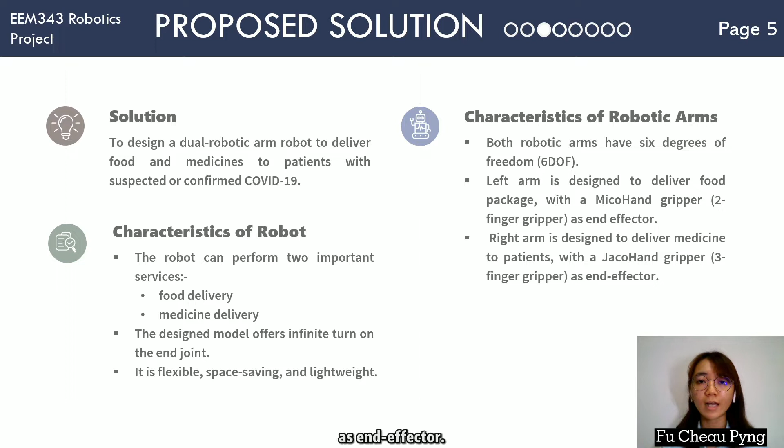The objectives of this main project are to incorporate a robotic arm, which is essential and can be used in hospital for food and medicine delivery purposes, to reduce healthcare workers' workload, to increase the efficiency of food and medicine delivery, and to lower the risk of infection amongst the healthcare workers.

To calculate the forward kinematics of the robot, the Denavit-Hartenberg convention is used. Firstly, draw the kinematic diagram of the right robotic arm and assign axes onto each joint. Next, write down the DH parameters for each joint.

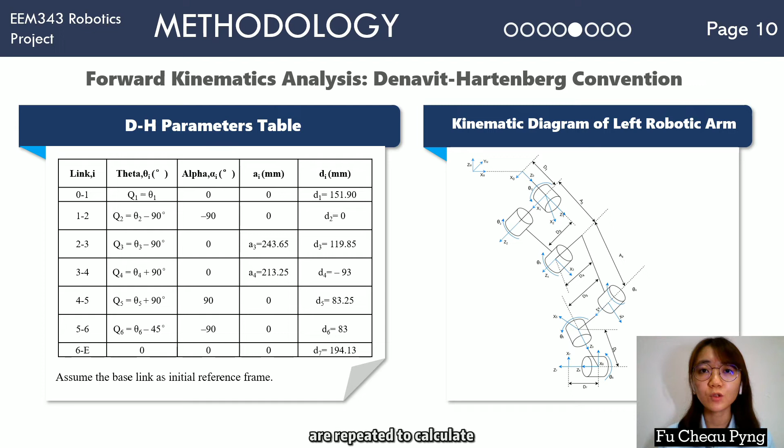Each joint transformation is formed by substituting the corresponding DH parameter into the homogeneous transformation matrix. The total transformation of the right arm of the robot is calculated as shown in the slides. The previous procedures are repeated to calculate the forward kinematics of the left robotic arm.

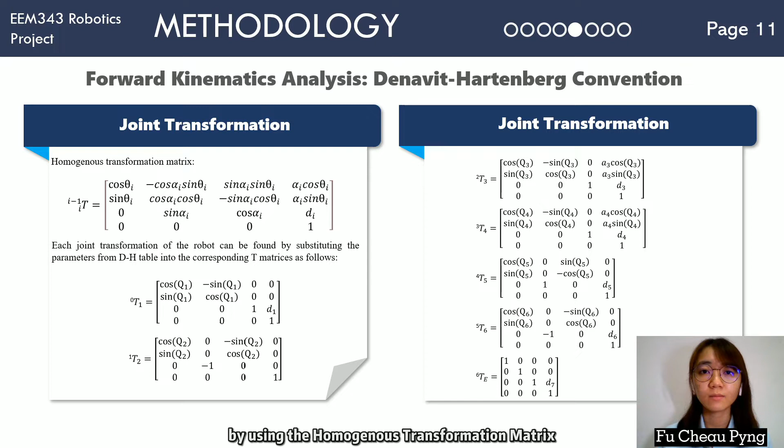Again, each joint transformation is calculated by using the homogeneous transformation matrix. The total transformation of the left arm of the robot is calculated as shown in the slide.

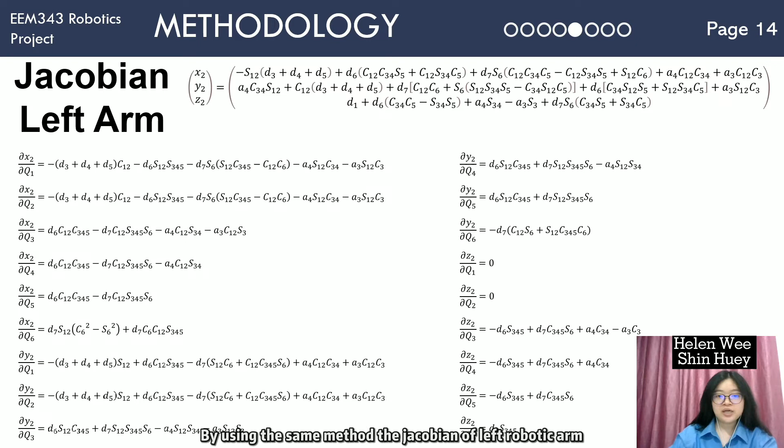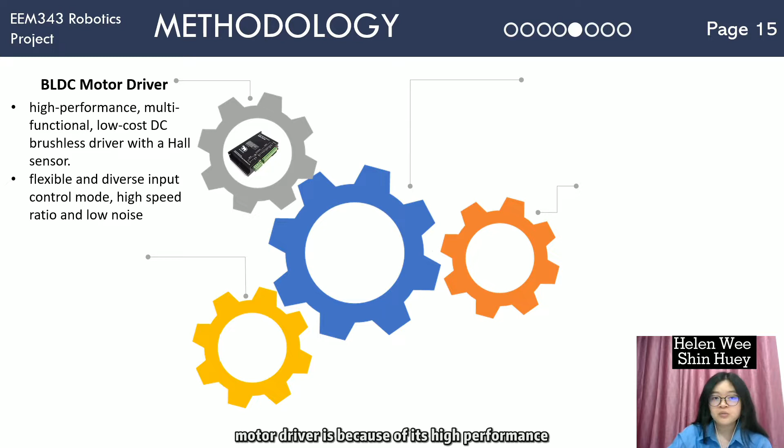Next, I will share about the components being used for hardware design. Although this NurseBot is not developed in hardware, these are the components that we propose. The first component is the BLDC motor driver. We chose this motor driver because of its high performance, multifunctional, low-cost DC brushless driver with a Hall sensor, and it is also flexible.

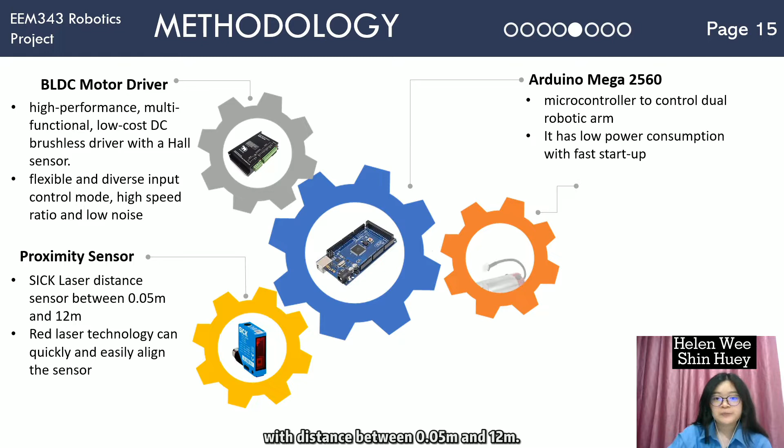The second component is Arduino Mega, a microcontroller to control the dual robotic arm. The third component is a proximity sensor. The sensor we chose is a SICK laser sensor with a distance between 0.05 meter and 12 meters. The last component is a brushless motor. It has a high torque-to-weight ratio and it can help improve efficiency and also reduce noise and corrosion.

Hi, I'm Kelvin, and now I'll talk about the methodology. The arm and the NurseBot base were first designed in the CAD software SolidWorks. The geometry of the arm was reverse engineered from the UR3 universal arm, including the dimensions and the mass property.

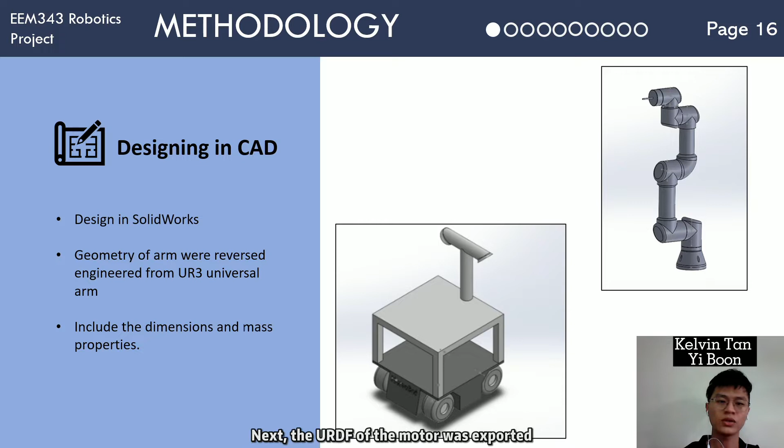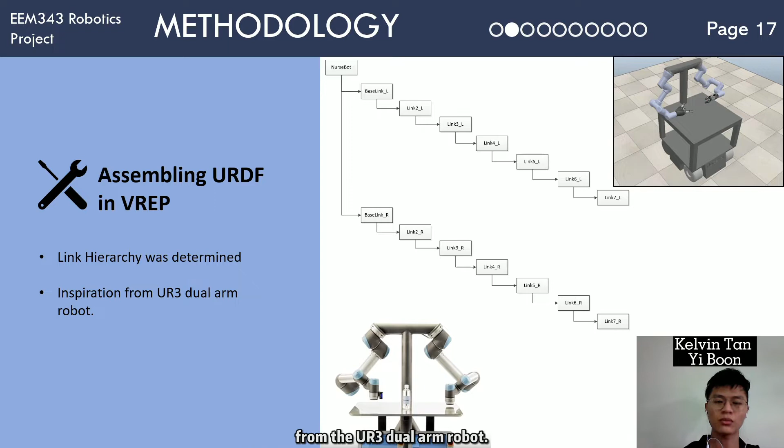Next, the URDF of the model was exported, then we assembled the URDF in VREP. The link hierarchy was determined, and the design of the NurseBot was inspired by the UR3 dual arm robot, which is shown by the picture in the bottom left of the slide.

Next is the control design of the arm in VREP. Once the URDF of the arm was imported into the VREP scene, the joint properties such as the limits were set, the mass, the mode of joint operation, and the maximum torque of the motor were also configured.

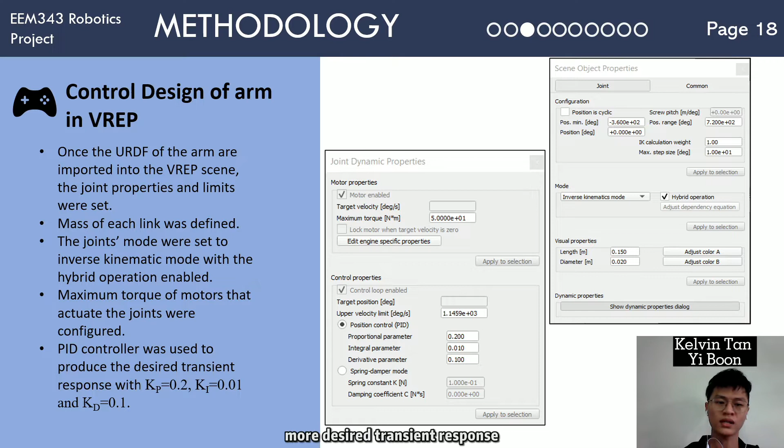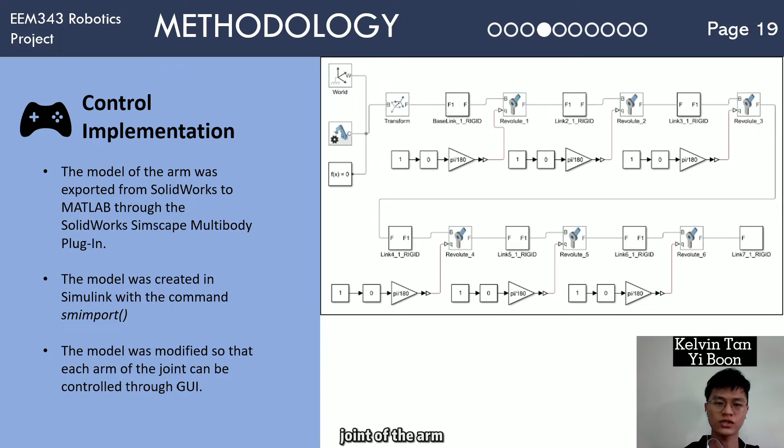Lastly, the PID controller was implemented in order to produce a more desired transient response. Next is the control implementation. The model was exported from SolidWorks to MATLAB into Simulink, and then modified so that each joint of the arm can be controlled through the GUI. The GUI of a joint space controller was created in the App Designer in MATLAB.

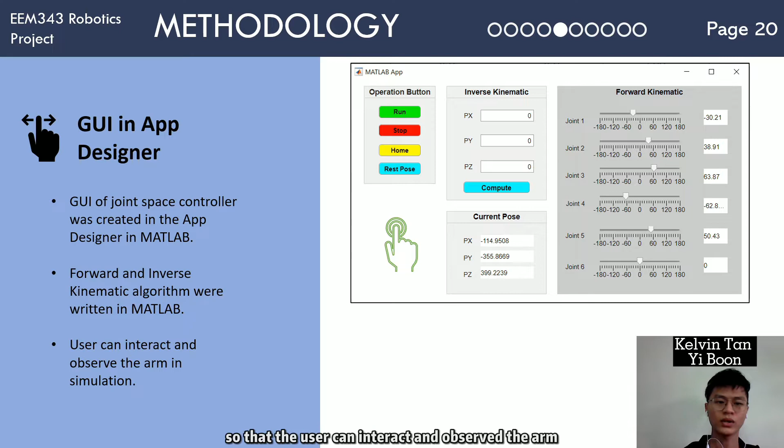The forward and inverse kinematic algorithms were written in MATLAB so that the user can interact and observe the arm in real-time simulation. The configuration of the robot arm was presented in the Sim Mechanics Explorer.

Next, I'll talk about the gripper design on the right and left arm. JacoHand was one of the available grippers in VREP. Due to the cup's special geometry, which is an inverted frustum, it requires at least 3 points of contact to

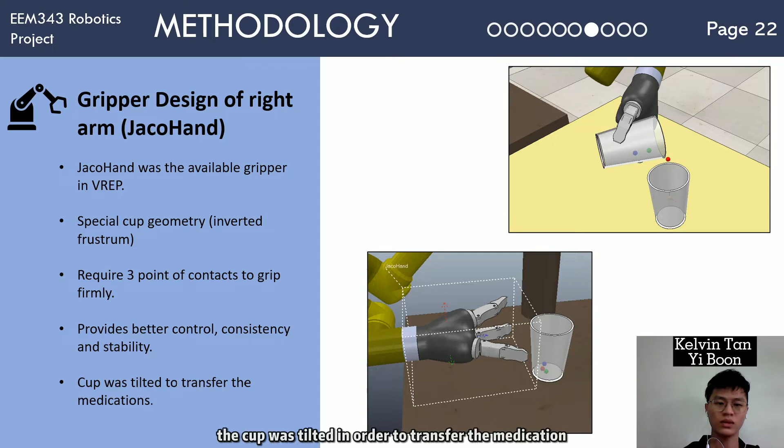grip firmly so that it could provide better control and consistency during the task. Lastly, the cup was tilted in order to transfer the medication.

Next is the left arm. We are using a MicoHand for the left arm because the food package's handle was to be gripped. So the challenge was how we want to orient the end effector in order to place the packages upright along

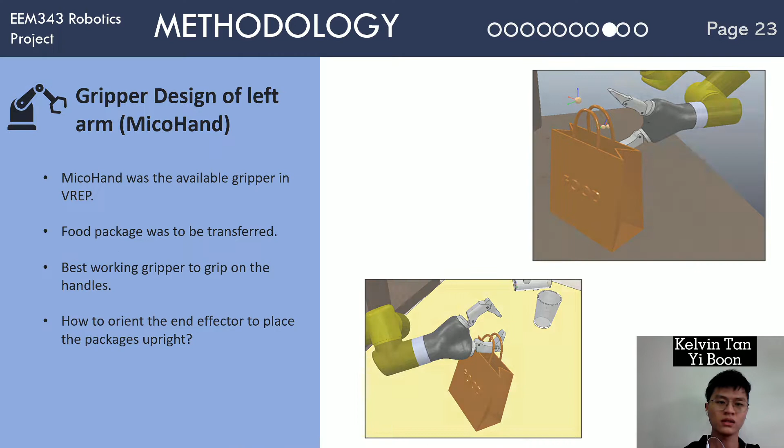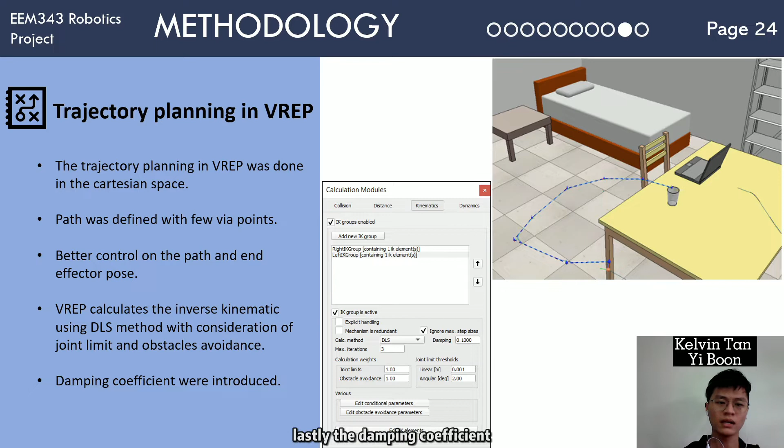the path. So trajectory planning comes into place, designed in the Cartesian space where the path was defined by a few via points so that we could have better control on the path and the end effector poses. Lastly, a damping coefficient was introduced so that we could reduce the oscillation along the path.

And finally, this was the flow chart of the whole robot. So the left side of the chart was the positioning, and the right side was the task performed by the left and right arm simultaneously.

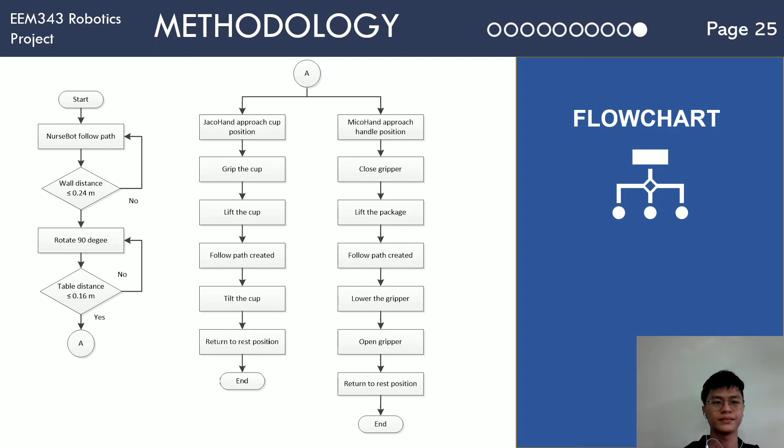For analysis, trajectory planning is being performed. Trajectory planning assists the end effector to move from point A to B in a certain period of time. It also helps to avoid obstacles and unnecessary strains in the joint or actuator. It can be implemented on two kinematics: forward and inverse kinematic.

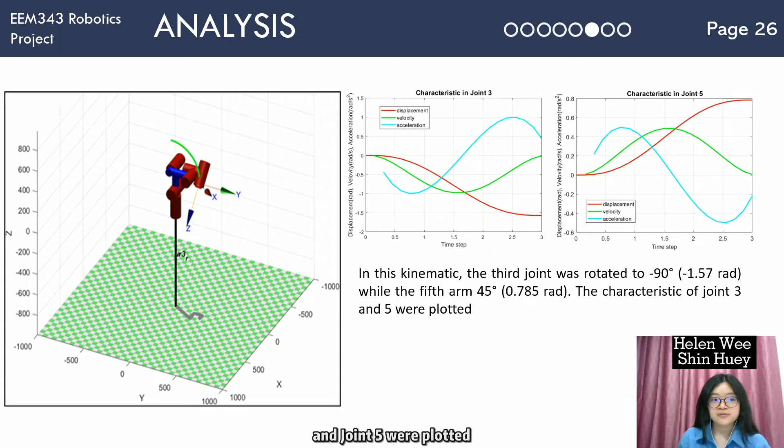In inverse trajectory planning, the robotic arm was programmed to move from the rest position to the final position, where the transfer of medication takes place. The inverse kinematic joint space trajectory algorithm implements spline interpolation of the 4-3-4 trajectory.

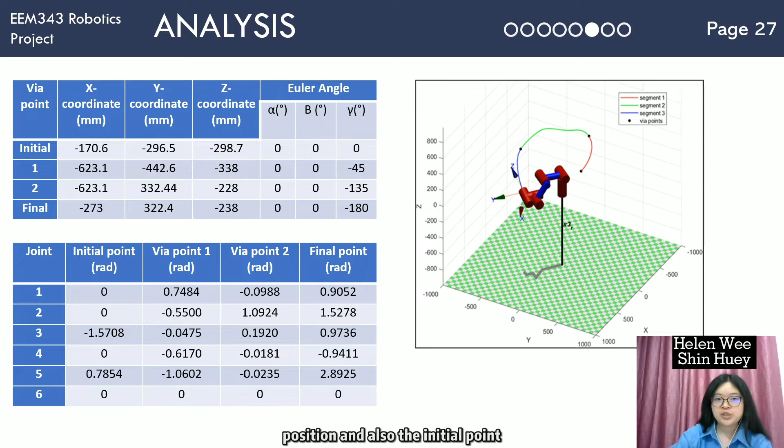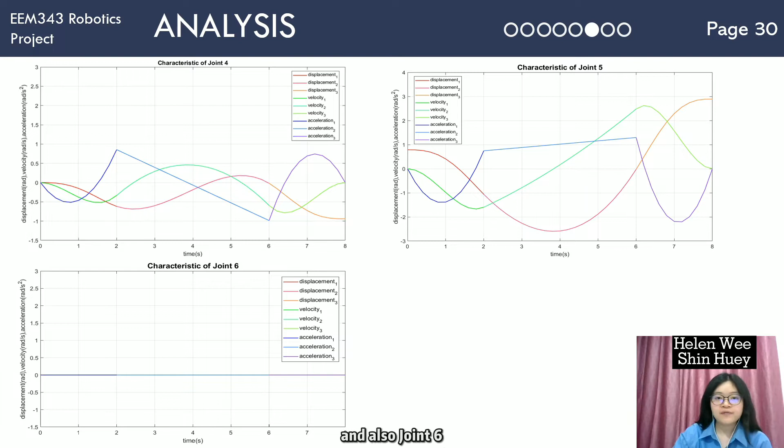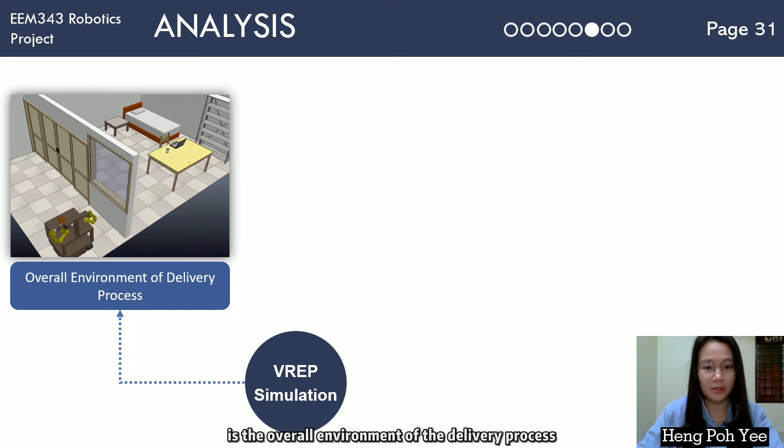For VREP simulation, the situation is created to demonstrate the hospital ward for food and medicine delivery purposes. The first screen here is the overall environment of the delivery process, while the second screen shows the NurseBot

following the trajectory path to the desired location. And the third screen shows the NurseBot delivering the food and medicine.

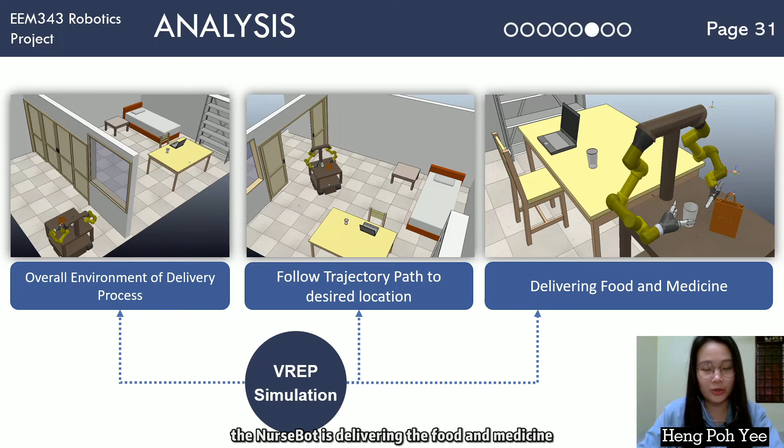For robot dynamic analysis, the robot has 6 revolute joints, where the axes of joint 2, 3, and 4 are parallel, the axis of joint 1 intersects and is normal to the axis of joint 2, and the axis of joint 5 intersects and is normal to the axes of joint 4 and 6.

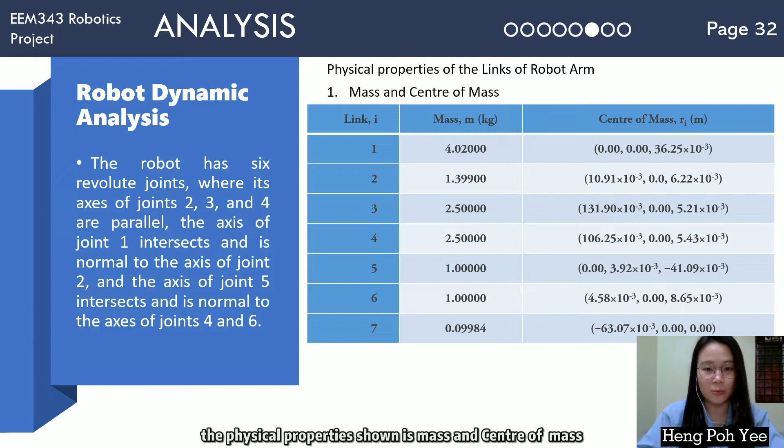The physical properties shown are mass and center of mass, defined from SolidWorks. The table of moment of inertia obtained from SolidWorks is also shown. The physical properties of the dual robot arm are tabulated. These are required for the dynamic analysis calculation, using parameters of mass, center of mass, and inertia, for further calculation in MATLAB.

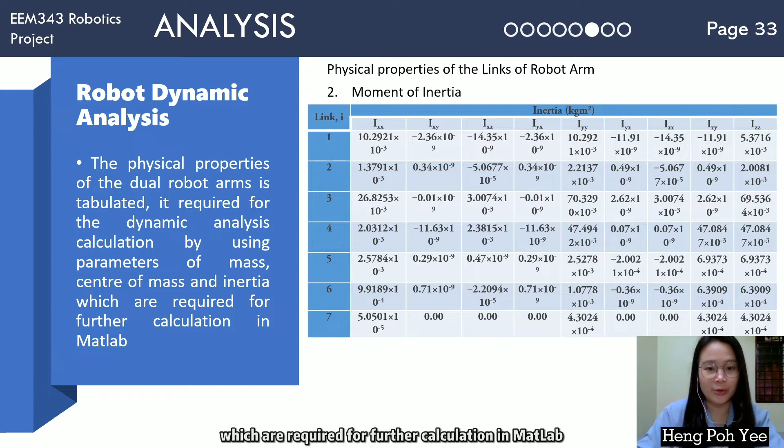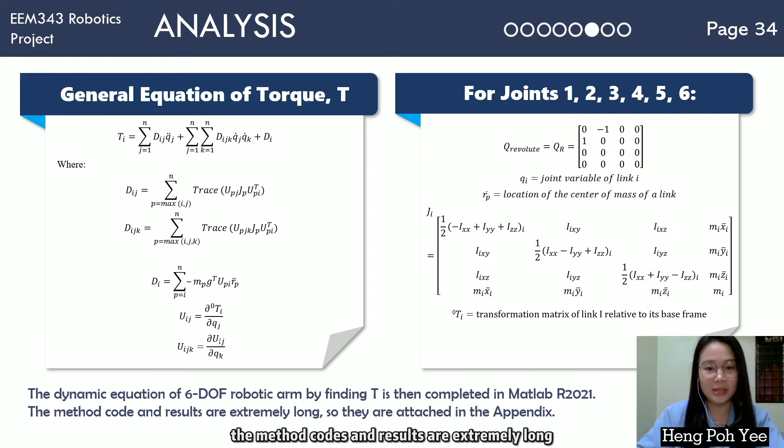The general equation of torque for joints 1, 2, 3, 4, 5, and 6 are shown. The dynamic equation of the 6 DOF robotic arm, by finding T, is then completed in MATLAB R2021. The method, code, and results are extremely long, so they are attached in the appendix.

In discussion, since the successful development of the robot, the objectives in the paper have been achieved. Such food and medicine delivery robot can be one of the larger investments for medical workers. The problem of labor shortage in the hospital will be solved, and the physical and psychological pressure of the frontliners will be reduced as well.

The robot can be used to reduce the risk of frontliners because it allows frontliners and patients to maintain a better social distance to avoid cross-infection with COVID-19.

There are 2 problems faced during processing the simulation design of the food and medicine delivery robot. The first problem is the calculation of the inverse kinematic equation. The kinematics of the UR3 is extremely computationally intensive due to the geometry of the robot arm, and the calculation of each joint variable is difficult to determine by manual calculation.

The solution proposed to solve the large number of DOF uses MATLAB tools to find the solution that could converge to a single final position of the arm. Other than that, the problem we face is the determination of the cup and food package handle position for the gripper to reach. In the solution proposed, the cup and food package are positioned at a fixed and known position.

During the COVID-19 pandemic, energy waste in the hospital has increased in terms of electricity and water. The massive number of patients has boosted the demand for high-energy equipment in the hospital for healthcare purposes. In this paper, the robot has achieved 2 of the 17 goals in the United Nations Sustainable Development Goals.